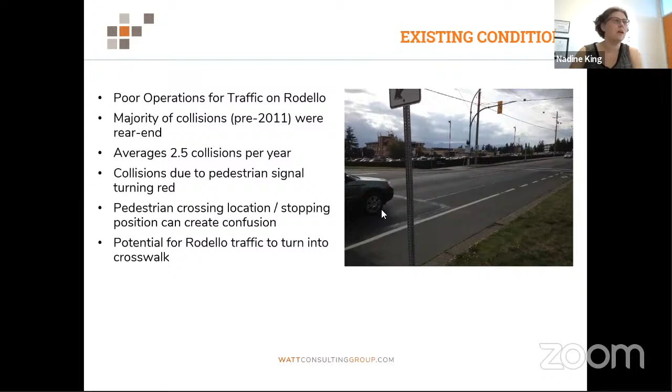Back in 2011, and then reiterated in the new updated master plan, we looked at multiple options for this intersection, things like restricting movements and full signalization. Basically, the roundabout was the best option identified for the location. It provided all movements for all user groups - bikes, pedestrians, vehicles - could accommodate heavy traffic and buses, and would provide good traffic operations for all legs going into the long term.

In 2014, Watt Consulting was hired by the town to prepare the preliminary and detailed design drawings for the project. We looked at 4 different options for where the roundabout should be located - closer to the east side, closer to the west side, further north, or further south into the hospital property. We ended up balancing an approach that minimized property impacts as much as possible and created the least amount of additional work. We got that design to about a 95% level, very close to being finished, and then it was decided to put it on hold.

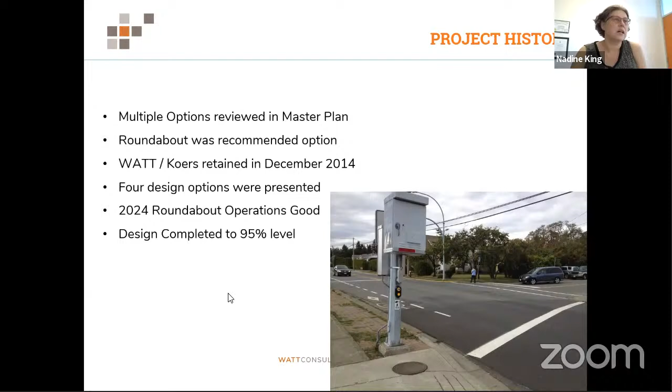And then we have a nice center island that's about 12.5 meters in diameter - a fairly large area to allow for some potential landscaping, a gateway feature, sort of sky's the limit of what the town would like, from very minimal. We've seen them as simple as some rocks with growing rose bushes, to some very complicated things with fountains and statues in the middle, giant anchors, all kinds of things. So a variety of options would be available for the town to put there.

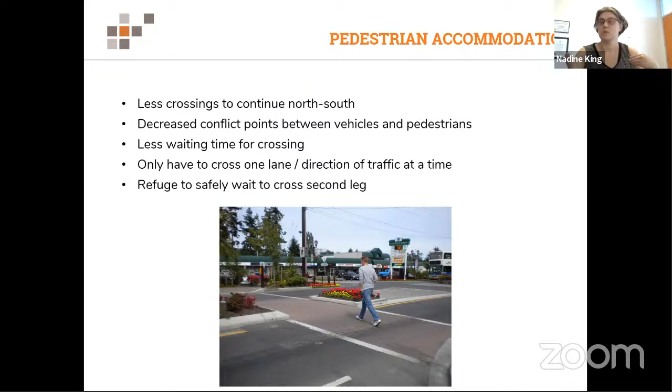We provide a refuge island on all 4 legs, so you only have to cross one leg at a time. Most people continue on, but if the car in the opposing direction doesn't stop, you have a safe place to wait. You're exposed to traffic a lot less, and it's a lot shorter crossing distance. You just cross one lane, refuge, one lane, versus being exposed on that much longer crossing.

For cyclists, we decreased the number of conflict points. There's elimination of head-on collisions between cyclists and vehicles. It generally increased safety and comfortability because vehicle speeds are less through the intersection, and they have to start and stop less.

We've designed the roundabout for 2 options for cyclists. The first is a multi-use path around the outside. We basically widened the sidewalks and made them 3 meters wide, so cyclists can come off the bike lanes on Comox Avenue, exit onto the side, cycle around, and use the crosswalk to cross and continue on. When they get to the far side, they'd use a ramp like this to get back into the bike lane and continue along.

That's generally for your less confident or more concerned cyclists. It takes them out of the flow of traffic and gives them some protection.

The other option is that cyclists take the lane. These are actually a couple of youth at a roundabout near the Victoria Airport. They've just taken the lane - they actually should be a little further out, but this is where they were comfortable. The reason they can take the lane is vehicle speeds are low, people are entering and exiting slowly, and they have lots of time to observe those cyclists. They tend to just allow the cyclists, even if it's a little slower than they would want, to go through the roundabout - it takes an extra second and that cyclist is through the roundabout in front of them.

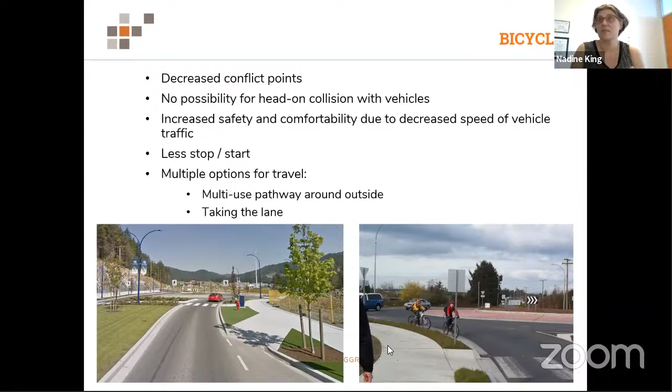For vehicles, as mentioned, there's a lot less conflict points. The current design has 18 conflict points for vehicles; the roundabout only has 8. As we mentioned, very long wait times potentially on the side road to get out would be significantly reduced and much more reliable so they can get out and make left turns particularly. The flow of traffic is more continuous, with less stops and starts. So what we tend to see is less long queues, but more of a rolling queue or rolling set of cars at roundabouts. And as I mentioned, it accommodates the large buses and vehicles that could be on this corridor.

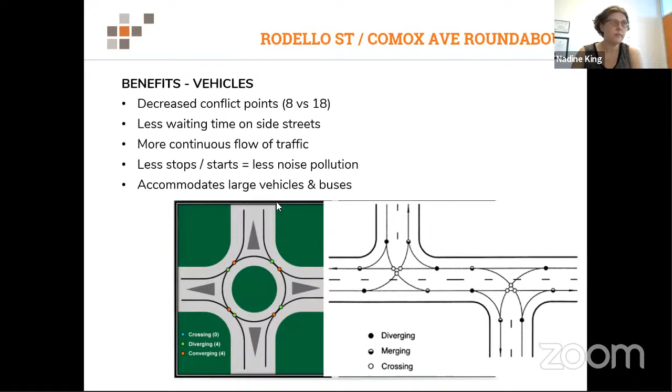In terms of safety, basically we eliminate head-on and side T-bone intersections, which generally reduces fatal collisions by 90% at intersections and 75% of injury. That's because the T-bone and head-on collisions tend to be your very severe accidents. Overall, the reduction in collisions would be lower, at about 37%, because there can still be collisions at roundabouts, but they tend to be slower since everyone's going much slower. So instead of someone at 50K and 25 kilometers an hour hitting each other, you've got a 25 and a 15 kilometer an hour vehicle, and they also tend to be more of these side swipes where they just touch on the side - a lot less chance for a very severe injury type collision.

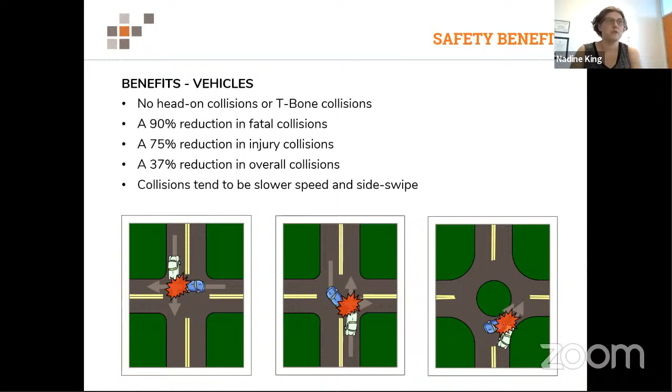And what that does also is reduce the cost on ICBC, so there's a benefit in reduced collision costs for them.

So the next steps we have to take with the town would be to finalize the drawings, get them those final 5%. We need to finalize some street lighting, and there were just some final details that needed to be confirmed for the drawings, and then they'd be ready to package up and put out for tender if the town decided to do that.

Back in 2015, the cost estimate was $1.2 million for all the works, including the roundabout, street lighting, and landscaping. The project was identified and is part of the DCC program, and there is $1.2 million currently in the DCC revenue for this project. That being said, we will be preparing updated cost estimates. It's a very challenging market at the moment to get good prices, and it can fluctuate quite a bit depending on the day and month a project gets tendered, but we will be doing our best to try and provide that with updated costs.

And a lot of that has to do with COVID and just lack of materials and lack of people and challenges that way. The city is also going to explore further funding opportunities. Town, I always write city. So potentially ICBC could contribute some money, as I mentioned, because you're reducing the number of collisions there. That's a cost savings for them, and they tend to be willing to put money in where you can save them money in the long term. And then there's also various grant opportunities, whether provincial or federal, out there.

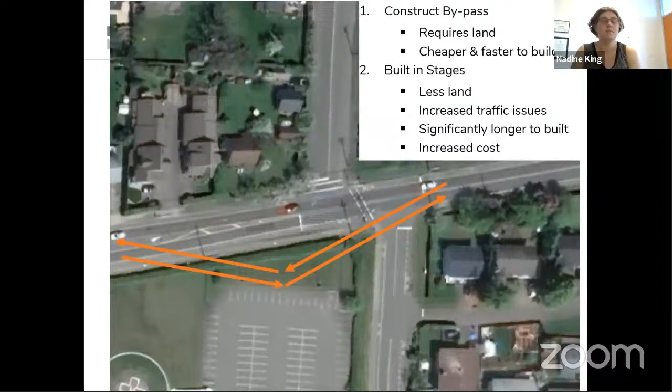And obviously, since it's going to take longer and they have to be working much closer to traffic, it costs more. So there's definitely ways to do it, but it's definitely very challenging. And I guess the third way really would be a full closure and a full detour, which is probably the least desirable way to do it, but is also an option using back road and Anderton and various routes, Glacier View, to get through the space. And so that's basically what I have to talk about, but happy to answer questions or thoughts.

All right. Thanks, Nadine. Does council have any questions? Councillor Minions. Sorry, Nadine, can you put the slide that has the diagram of the roundabout up? Yeah. Thanks, Nadine. It's just a really quick question.

Was the 1.2 in DCCs from 2015, like in the DCCs then, or is that a current 2021 amount in DCCs available? Maybe Shelley. Sorry, what was the question? If the 1.2 million we have in revenue is from 2015 or current? Yeah, you mentioned that there was 1.2 set aside, and I'm just curious if that number was from when the report was done in 2015 or would still be accurate for 2021 now. Yeah, that is to date. So that's what's in the DCC fund to date.

Thank you. And is it specifically set aside for that roundabout, or is that the total that is available in all of DCCs? So the current transportation DCCs has only the 2 roundabouts listed. This roundabout, Comox Avenue and Rodello, at 1.2 million, and then the roundabout for Glacier View and Comox Avenue for another 1.2 million. So we have a total of 2.4 million to collect for DCCs. The current revenue to date is half of that at just the 1.2 million. So that's where the 2 costs came from when we set up the DCC funds.

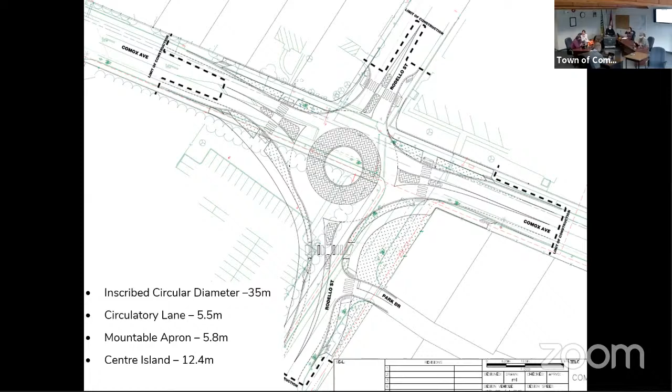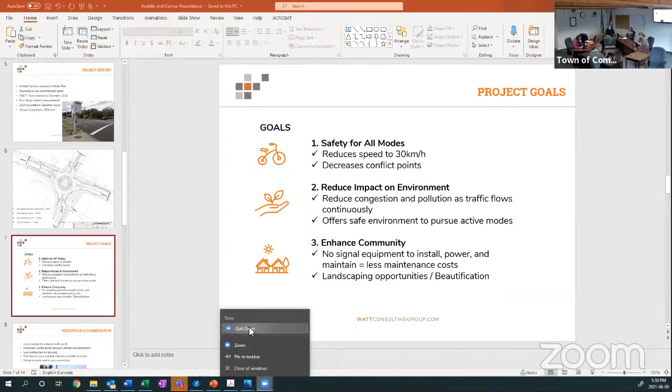Okay. Do I have full access? Yeah, only one screen can be shared at a time. So when Nadine's done sharing, you should be able to share yours, Shelley. Sorry, I'm trying to unshare here. You know what? I'll just leave the meeting, and that should unshare me. Thank you very much, and we'll talk again. Yeah, thank you. Is that working? Yeah, we got you.

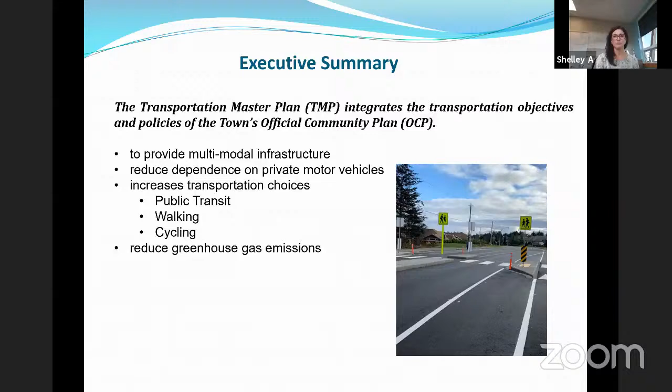To give you a bit of background, Nadine hit on it a little bit. In 2011, we had the comprehensive study that was done. We did that in concert with the OCP, the town's official community plan, where we really engaged the public. We had surveys and stakeholder meetings, and it was quite a bit more comprehensive than the 2020 transportation plan that we just completed. That was more of an update to make sure that our capital planning and our infrastructure feed into our asset management, that everything was in line, that we're on cue.

So that's what transpired in 2020. We looked at the different horizons: what's the current level of service compared to the 5-year horizon, 10-year horizon, and the 20-year horizon, so that we can make sure that our capital planning and infrastructure is set for the long term, so that we can really plan forward for that. I just kind of broke down all the different categories, which basically is in line with the transportation report that you have as part of your agenda.

This slide here just kind of shows you basically the annual daily traffic on our roads. And then that provides the road classification for the roads that we have in the town, which are classified from our local roads, which are less than 1,000 vehicles per day. We have our minor collector roads, which are greater than 1,000 vehicles per day. Major collectors are between 3,000 and 5,000, and arterials are greater than 5,000 vehicles per day.

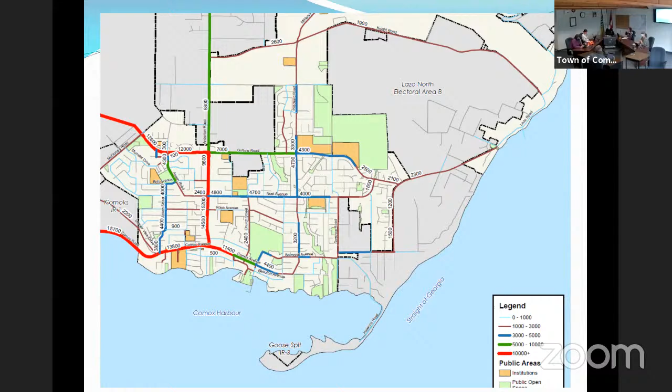A couple, the Comox Rodello, there's an improvement there, and I'll get into the improvements that we're going to be doing there in the next slide. And you can see that the majority are staying the same. The level of service rates basically is the amount of delay per vehicle for each movement and the entire intersection. So how much is the vehicle waiting to make a movement or a change in some direction.

A level of service A basically is representing the best operations, and then level of service E and F. E is for poor, and F is basically a fail, saying that's unpredictable, it's disruptive, and basically unacceptable. So your worst is your level of service F. As you can see, we have a number of them. Anderton and Comox Avenue is an F, Comox and Aitken is an F, Comox and Glacier View is an F, and the fourth, Comox and Rodello, is E to an F.

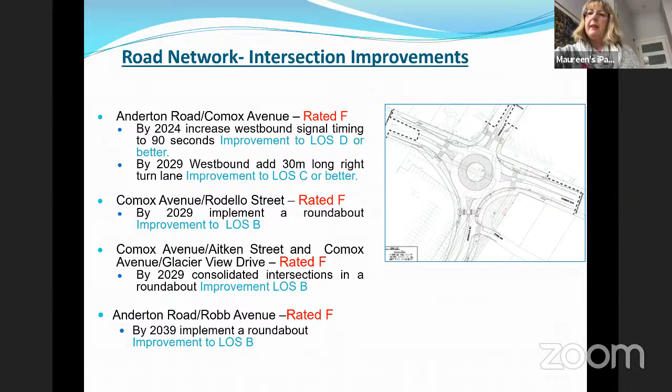This table here, it's table 5. It looks at basically the accident table, or a collision table, if you will. It ranks them from highest to lowest. This is data that's collected from 2007 to 2017 inclusive. It provides you with a total number of collisions over the 10 years, as well as the annual collision frequency. You can see that Anderton and Comox, and Anderton and Guthrie have the higher number of collisions, which, also looking at our 2011 data, is an actual increase of 18%.

Not surprising, because those are major intersections where we have a higher number of movements, where you have multiple lanes turning. And I think what Nadine mentioned is intersections, you have an increase of 16 conflict points. So not surprised that we're seeing higher collision rates at those intersections. The collision rates throughout the town of Comox are 40% below the provincial average. So that's good.

And we're only looking at 2017 at this point. When we did the traffic study, we started it in 2019, but we get data from ICBC every year, so we can look at the collisions. So that provides us some good data and criteria as we move forward at the intersections.

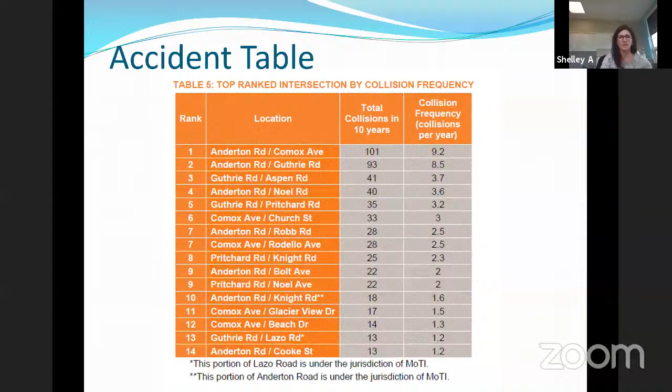More will come of this traffic calming policy once I get into the holistic report that Council had a resolution on earlier this year, so that I can address some speeding. So I'll review the speed limits at that time and maybe, I haven't given it any thought, come up to Council with what that could look like, and then the costs associated with potentially reducing the speed limit.

Craig had sent me not too long ago a clip that the City of Calgary just reduced their local roads to 40 km/h throughout, and that came in, I think, at a cost of $2.3 million for them to implement. So it does come with costs. So hopefully I'll have more to Mayor and Council on that when I start preparing the report on reducing traffic speed in the town of Comox.

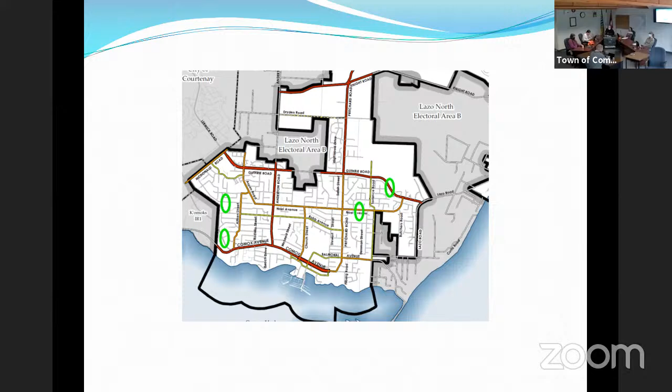This slide basically highlights the cycling and greenway network. To date we have 8 kilometers of dedicated bike lanes within the town of Comox. Actually, of our 100.5 kilometers of road, we have 30 kilometers of bike lanes, bike routes, or shared bike lanes. That's 30% providing cycling modal transportation for the community, which is quite high and great.

The study recommended a number of improvements to the cycling and greenway network. The first is to put in buffered bicycle lanes for arterials and major collectors where traffic volume is much higher, and unbuffered lanes for collector roads and local and rural roads. Then there's the greenway multi-use path along Dryden Road to Cambridge, and the Lazo multi-use path from Forester to Guthrie, which you're all aware of.

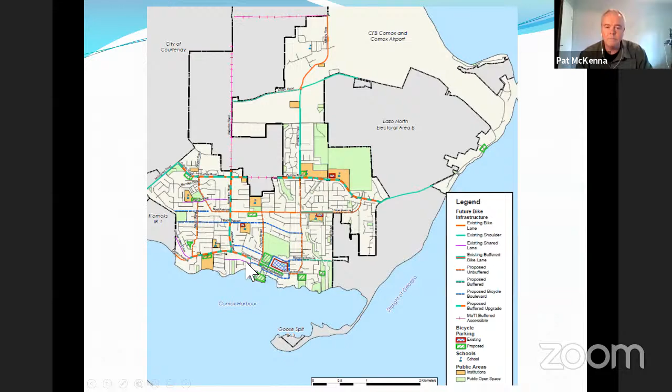Yeah, so as part of the review of the conveyance coming through the town, if they're going to be removing asphalt and repaving it, we're looking at upgrading it to our standards. So if it's on a classification of road that calls for a dedicated bike lane, we'll work with them to hopefully get that as the final product moving forward.

Once we're done the preliminary design, staff will take that route of the conveyance through, and then we'll look at and compare what we have in our capital project plans and asset management plans, and then we can highlight what improvements need to be made along that route.

The other recommendation they had here was the greenway or multi-use path from Dryden Road to Cambridge Road, which is up in this location. This is Dryden, and is this right? No, that's Guthrie, further up. Further up here, sorry. So this is Dryden, and then we have Hudson coming down here. I don't have the road on here for whatever reason.

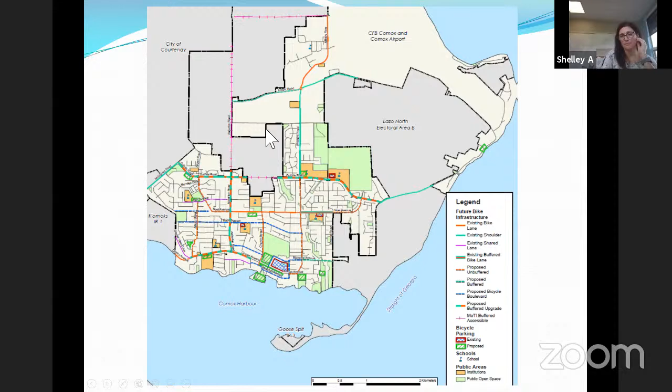I have it in our 2021 capital plan to secure that land so that we can move it forward. So that's that multi-use path whenever you see the Dryden Cambridge Road linkage there. That was a recommendation from the Greenway network study.

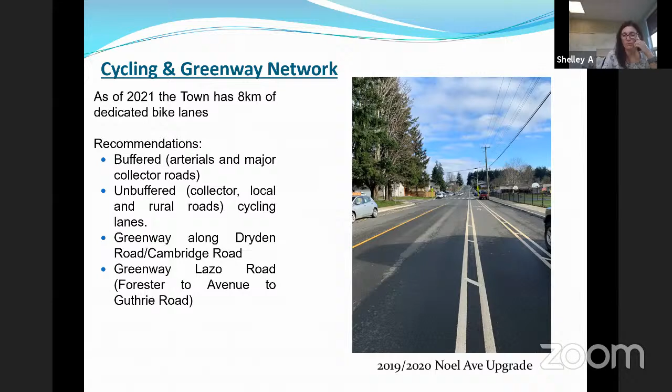The pedestrian network - the nice thing about it is we have a good one. We don't have sidewalks on both sides of our roads, but we definitely have sidewalks on at least one side for all of our arterial and major collector roads. That's good. It's really important to have that pedestrian connectivity, so when you're on a sidewalk, it doesn't just end - you're able to at least cross the road and get onto safe infrastructure as a pedestrian.

I didn't include this pedestrian network - it's quite busy, but they have a number of proposed roads where the transportation study recommended improving or installing them, based on volumes of traffic, volume of pedestrians, whether fronting schools, near schools, community center, downtown complexes, or multifamily development. So there's a number of improvements highlighted in the report.

I highlighted here improvements for basically crosswalk improvements that they recommended for the next 10 years. Brooklyn School mid-block crosswalk - I touched on that a little bit earlier, that Brooklyn School were recommending something be done in regards to crossing Guthrie Road.

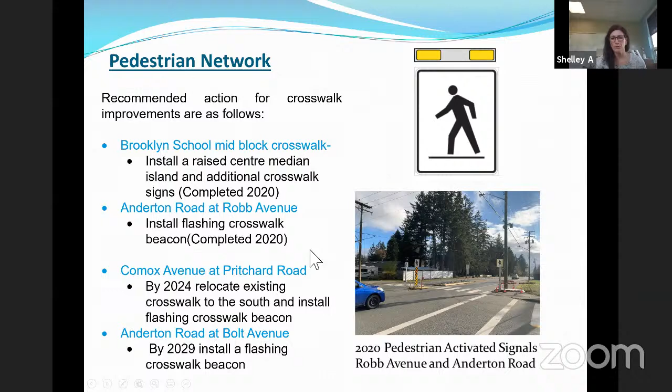Yeah, this is just a picture of the pedestrian activated signals on Robb that were installed in 2020.

Transit -- basically, well, we continue to see some improvements with CVRD. They're actually coming to do a presentation to council next week, to talk mostly about the exchange but also give an update on some of the infrastructure they have planned for BC transit.

We continue to work with CVRD and provide input on that service as things improve and move along. I sit on the Transportation Management Advisory Committee, which has all the jurisdictions participating -- City of Courtenay, Cumberland, myself, the town, and the regional areas as well. So we'll continue making improvements on that as we move forward.

We have $90,000 in the budget that council approved to put up more bus shelters as well, so we'll have a deep review of that. We've already started in-house, working with CVRD and our provider, to see where the higher numbers of transit users are and which locations don't have transit shelters, so that we can come up with a criteria of some sort to prioritize which ones get installed first.

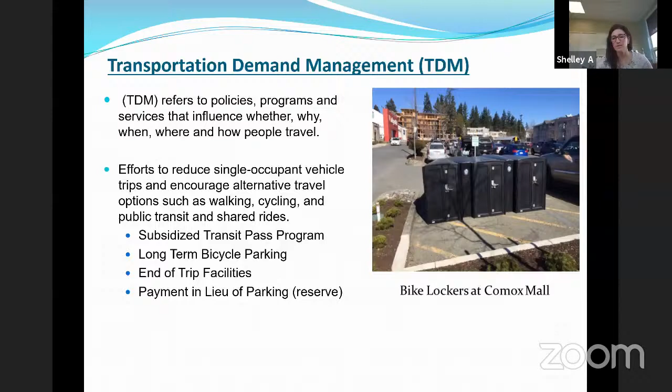The study suggested the town look at putting some effort into transit pass programs, long-term bicycle facilities, bicycle parking, and maybe even payment in lieu of parking. You can see a picture here of some bike lockers installed at the Comox Mall -- that's great for their users and trying to get employees to bike to work. The other suggestion was to work with facilities, as development happens, to provide shower facilities for employees so they can look at alternate modes of transportation.

The other emerging one, obviously, is the e-mobility services that we have. Currently 55% of the total greenhouse gas emissions come from transportation in the Comox Valley. So if we can promote as many electrical transportation options as we can, that's good. Electric vehicles, bikes and scooters. Electric bikes have been booming for sure, which is a good thing, and then electric vehicles as well.

We installed the 3 EV stations in town, Town Hall, Fire Hall, and the mall in 2020. I don't think they're being used as much as we hoped right now, and I think it's because of COVID. Everybody's working from home, not a lot of people are traveling, so the numbers are a little bit down, but hopefully that'll turn around pretty quick.

We also have a 4th EV station that will be put in town. We're probably looking at the community center as the 4th. I don't know if council recalls or not, but in 2019, I guess it was, council made the motion to work with the Mid-Island EV charging network. It's basically being spearheaded by the Regional District of Nanaimo.

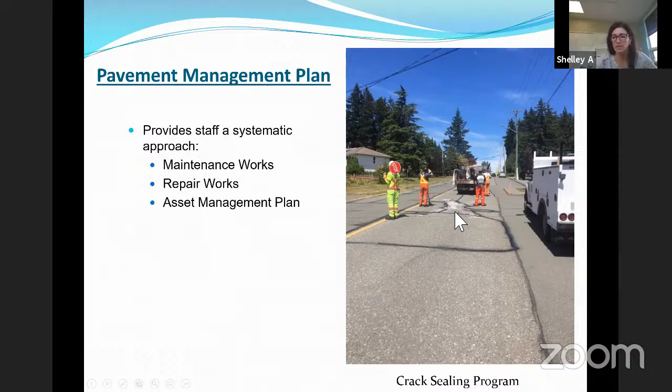And you can see from this picture our crack sealing program, which we do annually. It's quite an extensive program, so that we can prolong the life of the roads, and what makes sense. Once you get into a lot more crack sealing, that's more of a cost. So it's quite a balance for sure, but it's definitely a key component because, like you see, it's 60% of the cost. This averages out to about $2.1 million per year of improvements.

The remainder of the 52 million comprises sidewalks and roundabouts that are proposed, new sidewalks or upgrades and replacements, at 75%, and then greenways and bike lanes are 23%, and traffic calming is currently at 2%. So just sort of a breakdown of the capital planning and funding for the next 20 years.

So Shelley, do you know, if you were to average it out over the last 5 or 10 years, how much we would be spending now on an annual basis?

Because I take your 53 million and divide it by 20, and it comes to about 2.6 million a year, which, I mean, if you say it fast, it isn't that much. But we have nothing to compare it to. So I don't know what we're currently spending to see if that's a big upgrade or not.

Typically, I try to balance that out every time we do our financial plan of the 5 years. And it's not just traffic, but our whole capital plan, and that's storms, sewer, and water. I try to average about $3 million per year. If we have a huge project that's coming in, say if we do a roundabout and we're at 1.5 or 1.2, Noel Avenue was over $1 million, that would bump it up a little bit more if we have a major upgrade road.

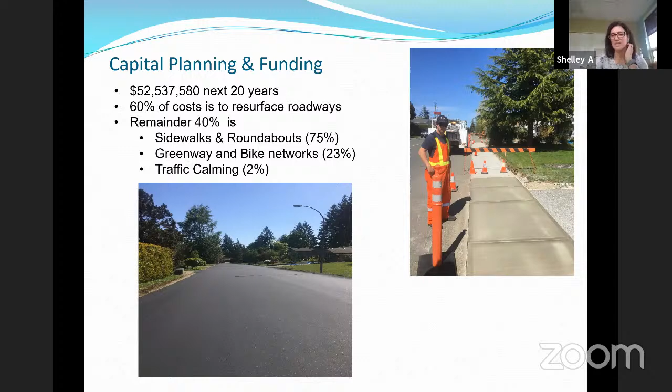And I think that's all I have. Anybody has any other questions or want to see any other slides? Any other questions from council? Well, you're off the hook, Shelley. Thank you very much. That was a great presentation. That was a big report there we had, so appreciate your time.

Great, thank you. Did you have something? Yeah, I just wanted to add, these types of reports are something that get filed away and then staff refers back to them quite often, when we're getting into budgeting processes and planning out, we come back to these. So one thing to keep in mind is just remember these are council's documents. They are the blueprint for which you provide the staff and how we're going to continue planning the city.

So when you have the time and you're going through these, if there's things you're uncomfortable about, you don't quite understand, or you'd like changed, let's make sure we talk about it and make those changes so that when we're getting into planning, we know the direction council wants to head. Great, thank you. Yeah, and thanks again, Craig, Shelley, for taking the time on that. All right, we'll move on. Russ, can I just ask one question? Oh, sorry. Yeah, go ahead.

No problem. Thanks. Maybe because the report was like 218 pages, I might have missed it, but on Buena Vista, we've had quite a few letters around the traffic calming in Buena Vista and recommendations that were put forward. Did I read correctly that it recommended a sidewalk down Buena Vista, or did it recommend calming measures, or just nothing at all?

Nothing at all. So this traffic report was done outside of council's direction to take a look at Buena Vista. The work that we're going to be doing to examine speeding will be done for the community based on what's here. And then you've also given us direction to look at what can be done on that street as well. And we anticipate bringing that back to you towards the end of this year sometime. We're not quite sure. We're just juggling all the priorities we have right now. Okay. Sorry. I thought we had not made decisions on Buena Vista because we were waiting on the traffic study, but my error if that's the case.